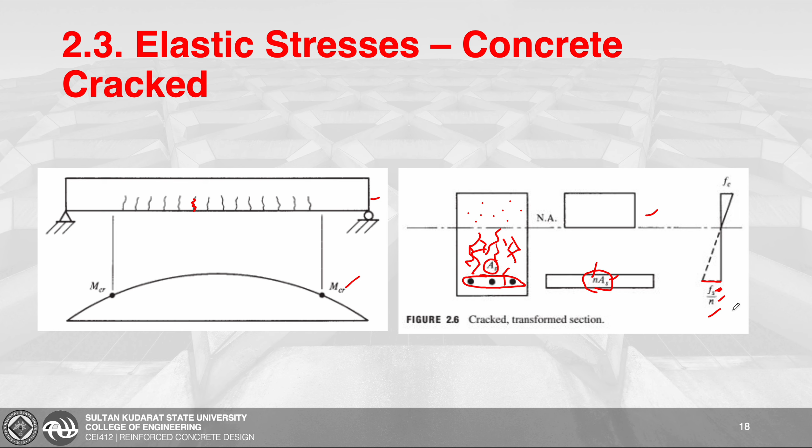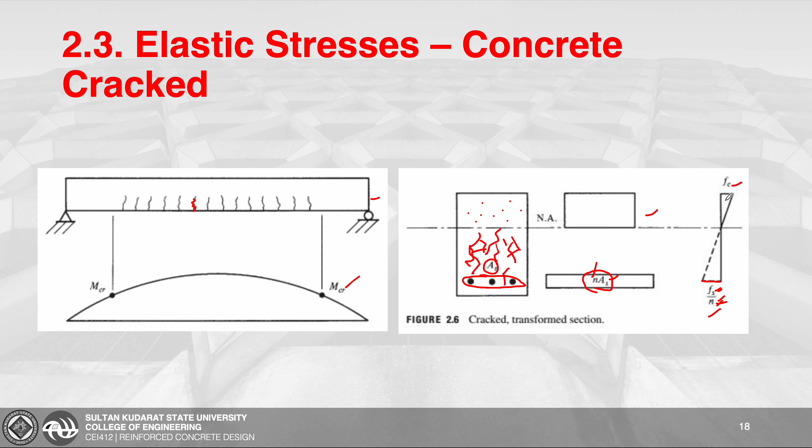And when it comes naman to our stress diagram, yung stress natin dito sa centroid ng ating mga steel reinforcement is equivalent to Fs over N, with which yung Fs, ito yung tensile stress ng ating steel reinforcement divided by our N na modular ratio. Na-divide to sa modular ratio na N because of the effect of the transformed area na method. And another stress that we have here is yung F sub C. Yung F sub C stands for the compressive stress ng ating concrete sa extreme fiber.

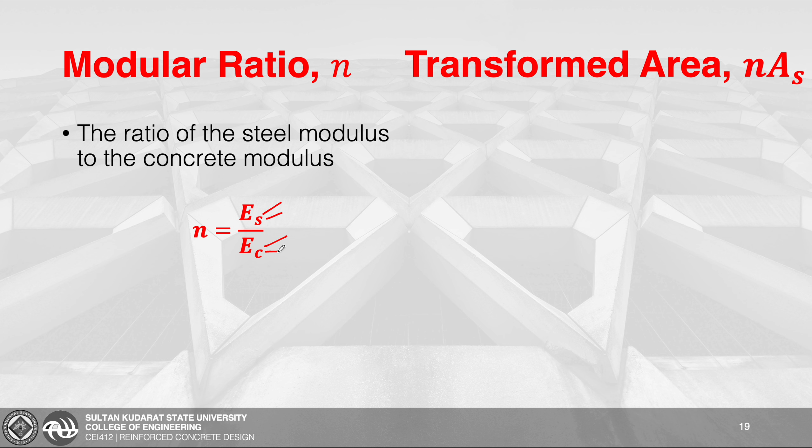Modular ratio N, so this is equivalent to the modulus of elasticity ng steel divided by the modulus of elasticity ng ating concrete. And based sa ating code, yung modulus of elasticity ng ating steel is equivalent to 200,000 megapascal. While ang elastic modulus naman ng ating concrete for normal weight is equivalent to 4,700 times the square root of our Fc prime. Transformed area, N times A sub S, ito yung equivalent area ng fictitious concrete that replaces the steel area para i-resist yung tension.

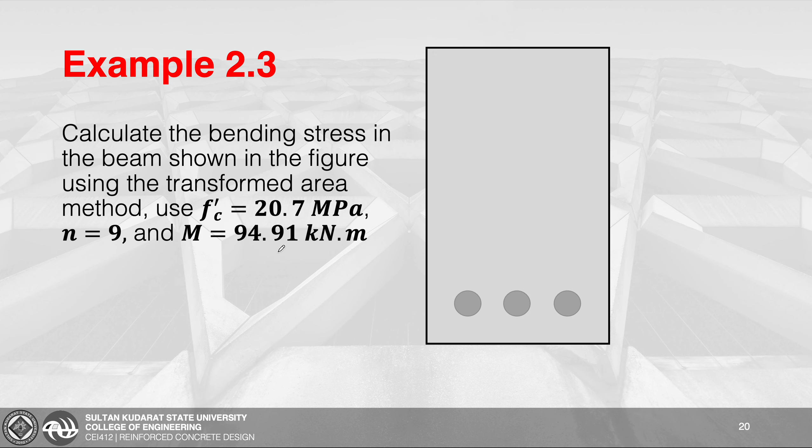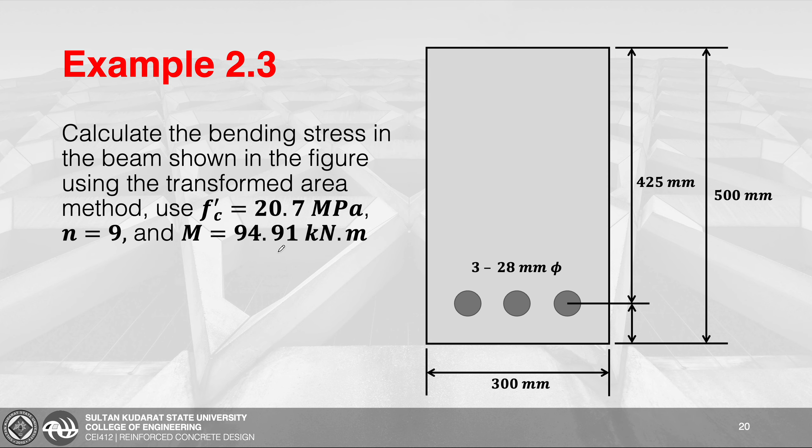We have here an example. So calculate the bending stress in the beam shown in the figure using the transformed area method. Use Fc prime equivalent to 20.7 megapascal and n equivalent to 9, and M, ito yung service load moment natin, to be equivalent to 94.91 kilonewton meter. Ito yung cross section ng ating beam, rectangular, and we have tatlong 28 mm diameter na rebars. Yung width ng beam natin is 300 mm. Yung total depth naman nito is 500 mm. Yung effective depth is 425 mm because of the steel covering na 75 mm.

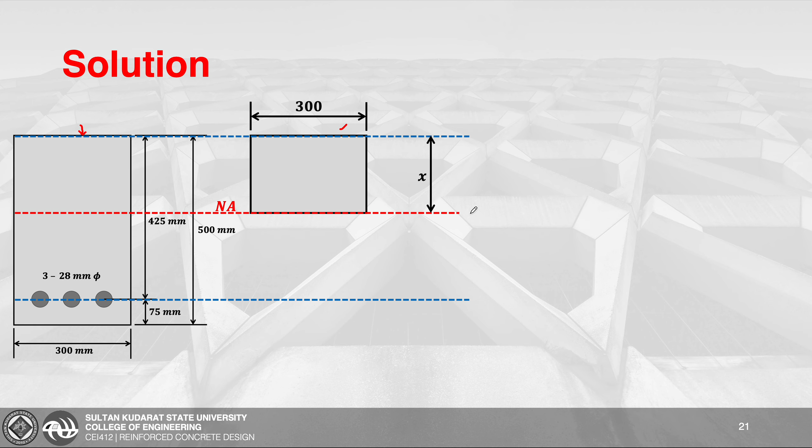For our solution, first mag-project tayo ng construction lines para sa magiging location ng neutral axis. After that, gawa rin tayo ng construction lines para reference lang natin dito sa extreme fiber sa compression side ng ating concrete. And then another construction lines para sa centroid ng ating mga rebars. After that, project tayo ng cross section natin dito ng ating concrete sa compression side, and this is located to be distance x from our neutral axis. Yung width nito is of course 300 mm na given sa ating problem.

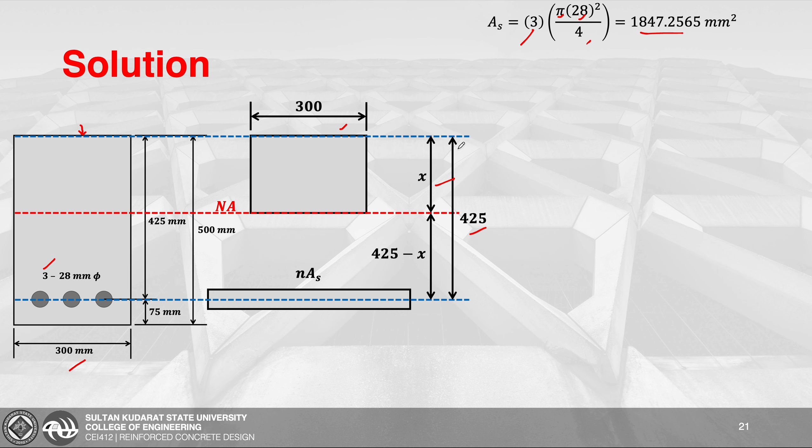After that is our transformed area ng ating steel reinforcement, which is equivalent to N times A sub S. Since yung effective depth natin is 425, so 425 minus X, ito na ngayon yung magiging location ng ating transformed area, yung centroid nito, papunta doon sa neutral axis. So first, i-solve muna natin yung total area ng steel since meron tayong tatlong rebar dito. So 3 times pi times diameter na 28 squared all over 4, we'll get this value. After that, solve natin transformed na area, n times AS.

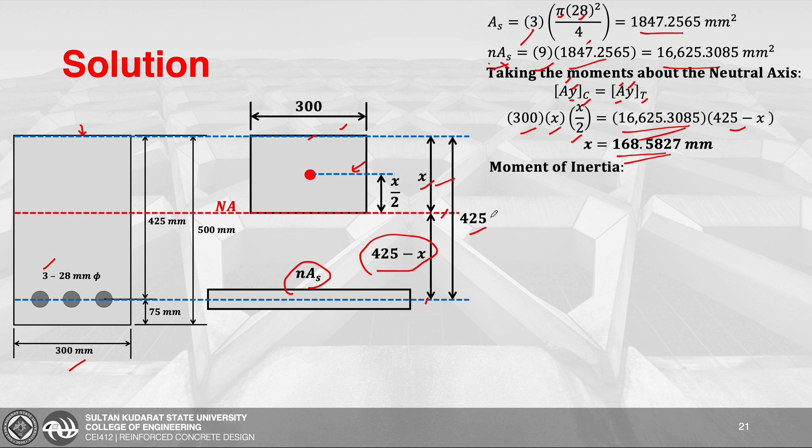So, the moment of inertia natin about the neutral axis is equivalent to BH cube all over 3. Take note itong BH cube all over 3 transferred na yan, moment of inertia ng rectangular na section. So no need to transfer na if you're going to make use of this equation. So yung B natin is 300, yung H natin is itong X, di ba? Which is 168.5827 cube. I-divide na lang natin to ng 3. So meaning transferred na to papunta dito sa edge niya, na neutral axis.